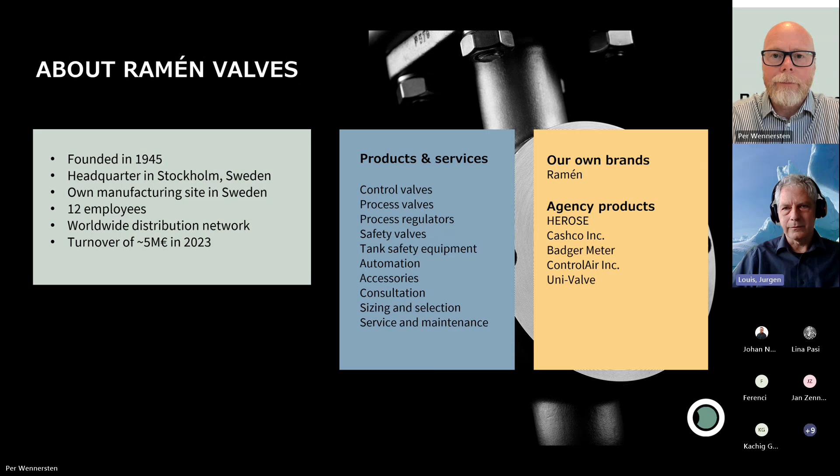So my name is Jürgen Louis, like Per already said. I've been with HEROSE for about 2.5 years now, working as business development manager for hydrogen. And before that, I've worked on hydrogen for maybe 15 to 20 years, amongst others as technology manager for hydrogen in Shell. So a long background. And the presentation today will be a very brief introduction to HEROSE, 3 slides only.

Some slides on our valves for hydrogen with limited technical explanations and a large part on reference projects. So where are we using the valves and where have we sold them? So HEROSE is a company which is 150 years old. Last year we had our celebration, 150 years. And it's a family-owned company, worldwide active. We produce a bit more than 500,000 valves per year. So quite a substantial amount. And our turnover is 95 million, bit more, with 500 employees, mostly in Germany.

So all our valves are made in Germany. At least all our hydrogen valves are made in Germany. Some other locations are in Australia and in India. So our background, mainly we sell valves for the gas industry. So on the left side, we can see the LNG value chain. So if you look at cruise ships, more than 75% of all cruise ships that are fueled by LNG use HEROSE valves. Last I counted, it was 17 large cruise ships. We do LNG filling stations, lots of things on LNG.

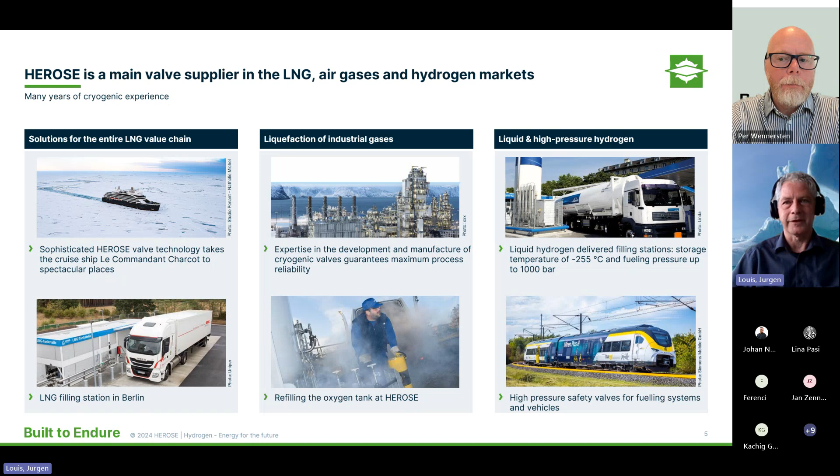And one of our main focal points, and it's also, of course, important for hydrogen, is quality. So we ensure that our valves that go out have the highest quality. And that starts with the development of the valves.

So a lot of testing, a lot of know-how that goes into the valves, to the purchase of materials, raw materials, only good materials, suppliers we have long relationships with, to our production facilities, so modern machines, everything made in Germany, good people, and of course then very important for our customers is all the certifications that we have.

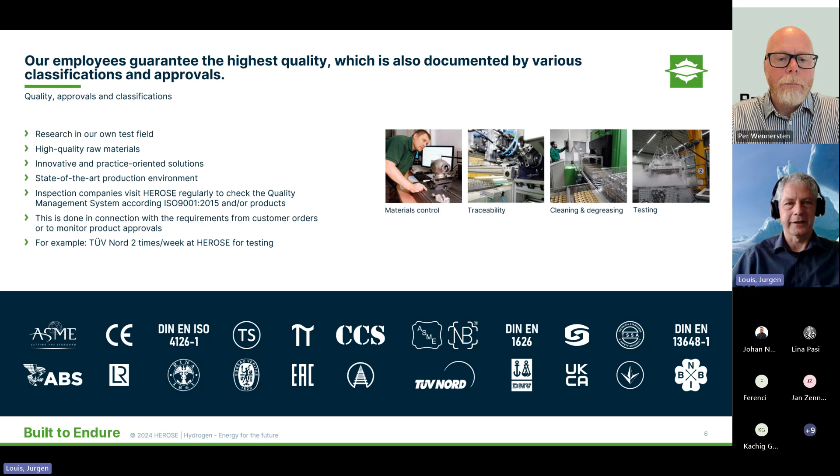Of course the ISO certifications, but all the approvals from, for example, shipping classes. You can see here on the bottom of this slide. So quality is one of our main focus, which is for hydrogen, of course, very important.

Going into the valves, this is the overview of the value chain for hydrogen, and actually we are present almost everywhere. So if you look at production on the left side, we sell valves for electrolyzers, we sell valves for chemical plants, so steam methane reformers, gas separation units.

Then going to storage and transport, so you can transport pure hydrogen in two ways, either as pressurized gas, usually around 250, but also 500 bar, or as liquefied hydrogen, cryogenic temperatures at minus 255 degrees Celsius, which is low, even below the temperature of liquid nitrogen. So there's some special requirements to the valves to be able to do that.

And then we go into end use. So as I said already, we sell a lot of valves, a lot of safety valves, especially for gaseous hydrogen filling stations. We sell into mobility with trains and also trucks. We sell a lot of liquid hydrogen valves for rocket launch platforms, for example, not in the rocket itself, but to refuel the rockets. So all these applications we sell hydrogen into.

And separately mentioned here on the bottom left is the ammonia pathway. So our valves are also suitable for ammonia. It needs some special changes. We call it the S version of our valves, and then they are suitable for ammonia as well. So ammonia is often transported as a cryogenic liquid, but only at minus 33 degrees Celsius, and our valves are used for that.

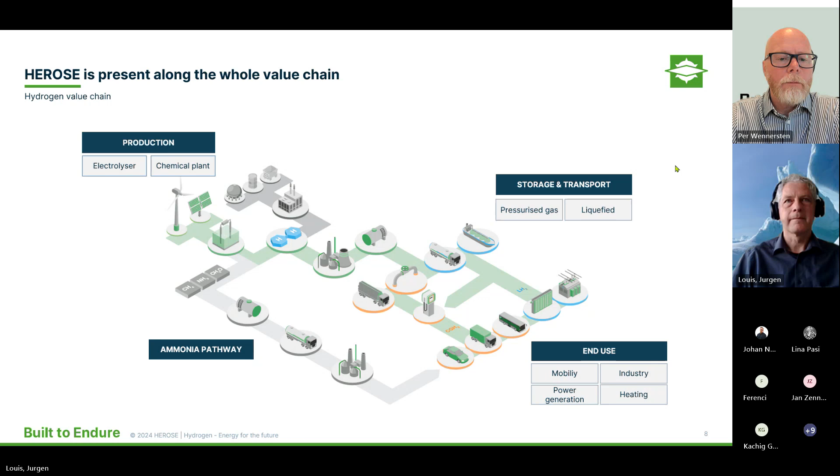An overview of the valves from left to right. The top entry valves, these are valves you can access from the top, so you can build them into a system, and without taking the system apart, you can access the valve, do maintenance, exchange parts.

That's especially important for hydrogen, if you have cryogenic hydrogen and you don't want to get any heat into the hydrogen. You can vacuum insulate the valve, so put tubing on it, make it vacuum, and so you reduce the heat leak into your hydrogen at that point. But that means you would have to break the vacuum if you want to do maintenance on the valve. But these valves you can enter from the top, so the vacuum remains intact, and you can do the maintenance without taking the valve out of your system.

So this is used for liquefaction plants, hydrogen liquefaction plants, but also for the distribution systems, so for tanks, for trailers. So basically everywhere where you don't have easy access to the valve for maintenance.

So then the 4 pictures next to that, with our, I would not say standard, but our more normal globe valves for hydrogen. So you cannot access these from the top. So you would not use them for a vacuum insulated system. But if you want to transport hydrogen either as cryogenic fluid or as gas, you can use these valves. So they're all optimized for hydrogen. It's our special valve range with better materials, and they go to a lower temperature.

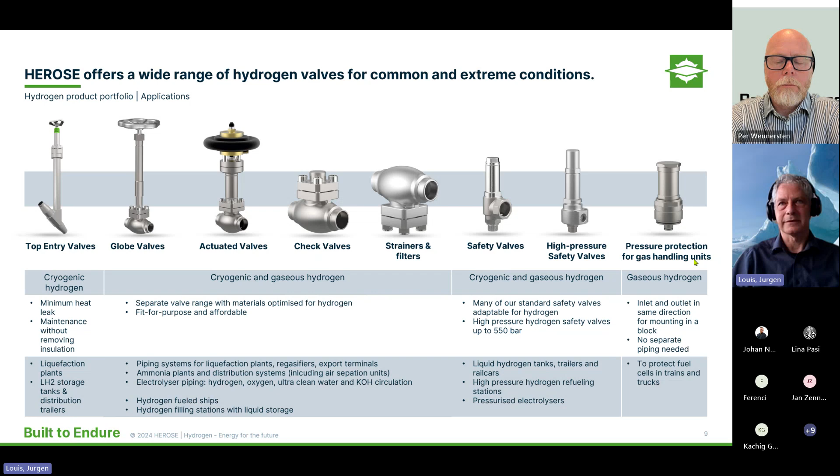And the special thing about this valve range is that it doesn't have an inlet and outlet in 2 different directions, but they both go downwards. So you can have a block with holes drilled into it, screw this safety valve in, and you don't have to put in any additional piping because the inlet and the outlet both go into the block. So this is a bit of a special case. We have to work with the customers to get all the connections right and the sealing tight. So these are on request, but it's a valve type we are promoting right now.

So we did tests at an institute with hydrogen. We filled the metal with hydrogen by having it under 100 bar or 50 bar hydrogen at 240 degrees for 11 days. So the material was completely filled up with hydrogen. Everything that can diffuse into it was in it. And then at the worst possible conditions, we did the embrittlement test. This is minus 50 degrees. And the cast material worked fine.

But we decided to increase the nickel content of our material a bit to get even better resistance to hydrogen. So all our metals are special. They're still the standard steel, but the bandwidth of the composition is very narrow, so that we are very good for hydrogen with this material. I will skip the welding part. It is very specific for some people. If you have any questions about welding with hydrogen, please send me a note and we can have a discussion in detail on that, but I think it goes a bit too far to go into there now.

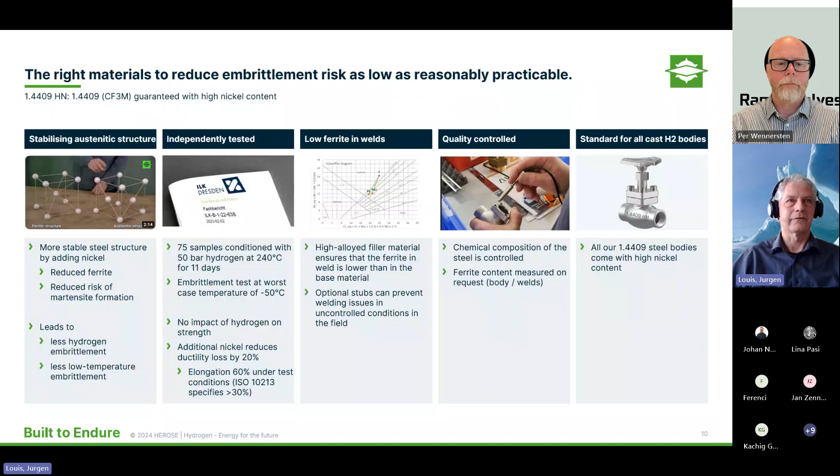So transporting hydrogen from one place to another under pressure, and the pressure of the hydrogen trailers is going up. It will be above 500 bar soon, because you get more hydrogen on your trailer at these pressures. This valve is intended to be the valve between the bundles of storage bottles, between each other and between the trailer to the customer. So it's actually an end valve, so it has to be very, very leak tight,

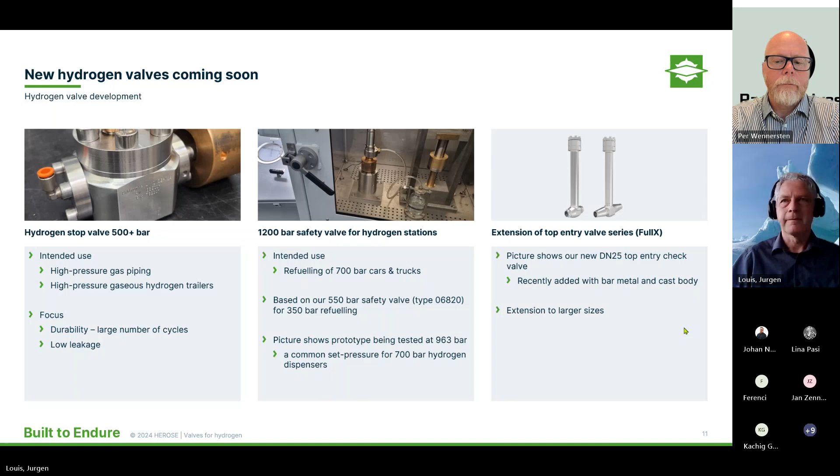Then on projects, going back on the FullX range, where have we used it? Where can we use it? So as said, it's ideal for vacuum insulation because you can maintain it without breaking the vacuum. We sell it for liquid tanks, trailers, for cold boxes for hydrogen liquefiers. We have requests, although not sales yet, for liquid hydrogen fueled ships. We sell it for rocket parts.

We go up to DN50 at the moment. We are extending it to DN100. At the moment, we have a different top entry range for DN100, which will be replaced over time with FullX. We've done tests with this. So one of our biggest customers is Chart, and they have tested it in the US and also approved it for their systems over the whole Chart group.

And they said we have not detected any leak during any of the tests we have done with the valves. The specifications are actually better than we put in our leaflet, and actually it's the easiest valve to operate that they have tested, so they were very positive about it. Sales, we have sold it for a hydrogen vaporizer, for example. I might have a different slide on that, so I will not go into detail on that. And also for helium applications, so we go down to liquid helium with these valves.

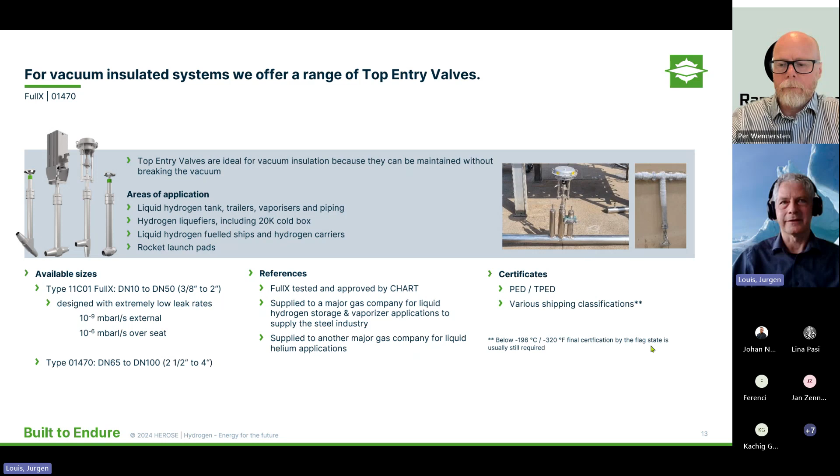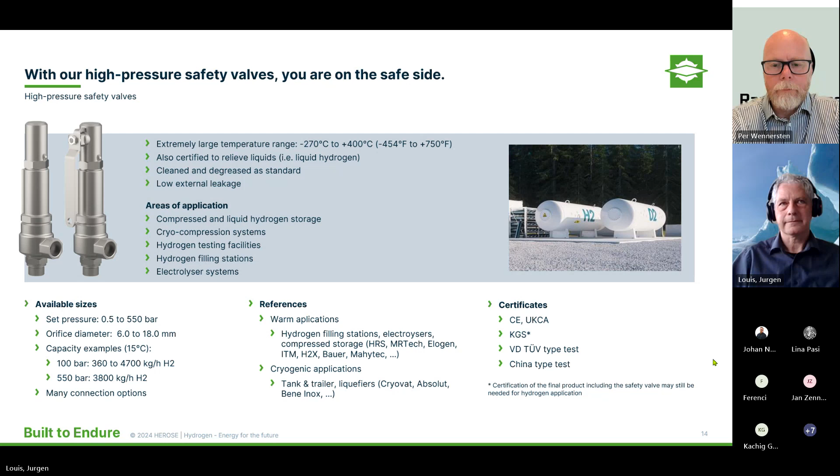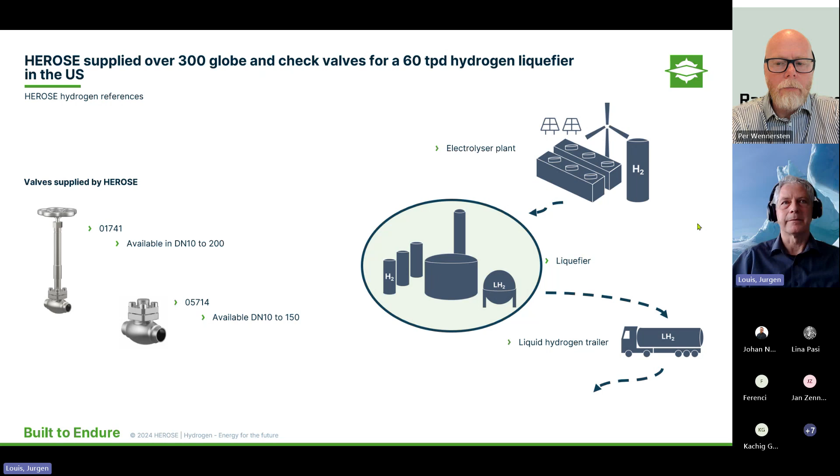We do not supply the valves for the cold box there because it's made somewhere else. But this is for the piping system from the liquefaction plant to the distribution to the trailers. So to the pumps, the pipes, the intermediate storage, and these kind of things. When the boil-off comes from the trailers, it goes back to the plant. These valves handle that. So it's in the middle of the distribution system. And we sold about 300 valves for this plant, so quite a big plant.

Similarly, the other way around, so regasification. So you have liquid hydrogen. This is actually a project in France. They have a liquefier in France. They truck the liquid hydrogen to a customer. The customer wants gaseous hydrogen through a pipeline, so the gas company regasifies the hydrogen where they need it and then puts it in a local pipeline to the customer.

And it is actually quite a nice project because we sold all the valves in this plant. So the hydrogen valves, the nitrogen valves, FullX there, also safety valves. So in the end, just for the regasification, we had about 200 valves for 2 trains of regasification in this plant.

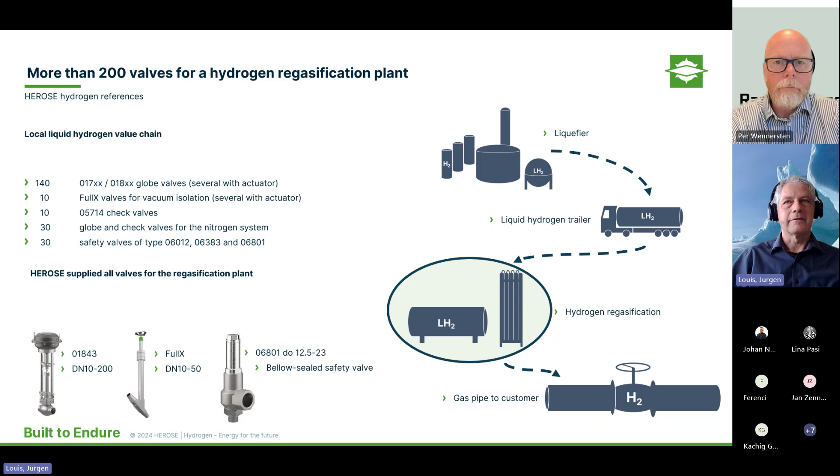And finally, I also showed ammonia on one of my first slides. I just wanted to highlight ammonia as a part of hydrogen, because ammonia is used to store and transport hydrogen. These are actually 2 very big projects from an American gas company. One project is in Saudi Arabia, one is in the US, where they have an ammonia plant. They have either renewable electrolysis or a steam methane reformer with carbon capture. From the hydrogen, they produce ammonia, so NH3. For that, you need the nitrogen as well. So you have an air separation unit next to the plant.

And this company buys a lot of valves, 1,200 valves for these 2 plants. And these are for the ammonia. They use the S version: some of our valves have a copper part for reducing the wear in the valve, and for ammonia, we replace that with a steel part. So it's the S version of our valves. This is a really huge project for us, and it has been going on for 3 years now. So green ammonia.